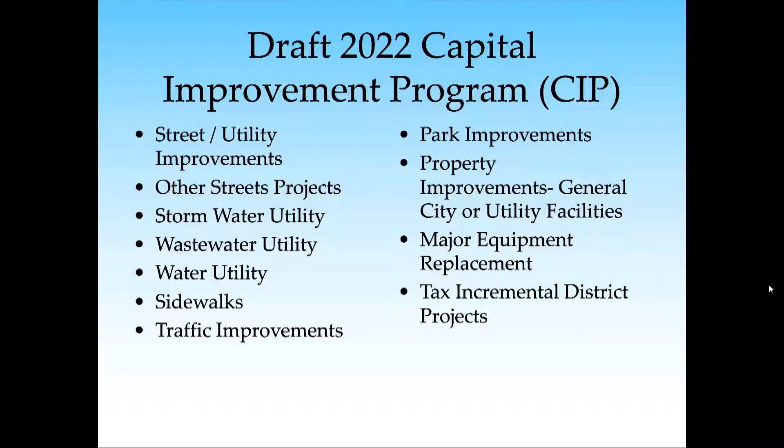It's been a great tool for helping us get information out about the 5-year program as a whole. Okay, it's more or less a dashboard for folks. Exactly what it is—it's an interactive dashboard for people.

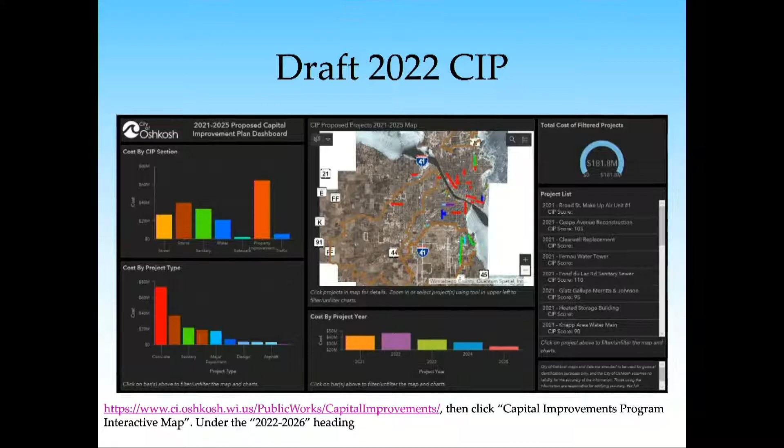Our biggest projects obviously are our annual street reconstruction projects. Those have the biggest impact on property owners, because quite frankly, their street's closed for several months, or at least torn up and closed for other parts of it. So looking ahead into the 2022 CIP, we break our streets down by their functional classification, whether they're arterials, which are the main thoroughfares, collectors, or local streets. So we've got kind of a mixture of everything in the street reconstruction program for 2022.

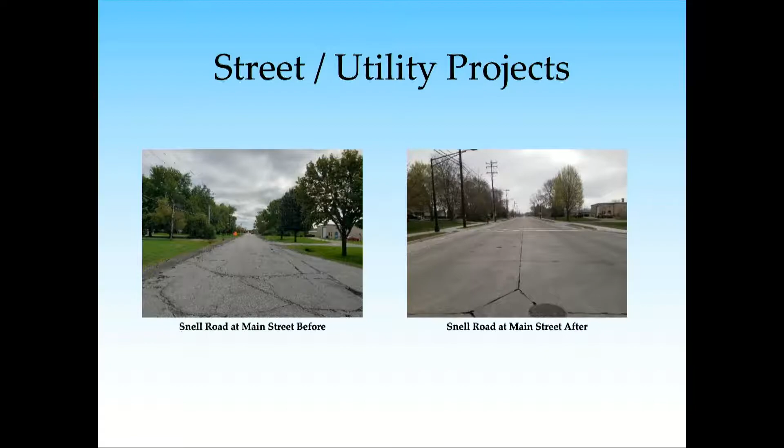Obviously, the biggest project of the year is Algoma Boulevard, from Wisconsin Street all the way to Congress Avenue. That's from Wisconsin through the university, up through the neighborhood association, past the museum to Congress. That is a mile-long stretch of street, and it's going to be a very large project with a lot of impacts.

We've been coordinating with the university for several months now and will continue to coordinate with them to try to make the project go as smooth as possible. Inevitably, because it's such an old street with such old infrastructure, there's going to be some unknowns that we'll encounter, but we're doing a lot of pre-planning with the university and private utility companies to identify everything we think is there so we can work around it in the plan.

That also includes the utilities under the street, it's a complete reconstruction, so sanitary sewer, water main, and storm sewer will all be replaced. Right now it's utility-owned street lighting on the WPS power poles; we'll be converting that over to a city-owned street lighting system as well.

The rapidly flashing rectangular beacons that are in use at the Reeve Memorial crossing right now, but not at any of the other crossings along Algoma, will be added to all of those pedestrian crossings as well.

We've also met with Wisconsin Public Service already to talk about their improvements. They're working with the university on trying to do some undergrounding of their electric in that area as well. So there's going to be a lot of things going on throughout next summer on Algoma, and a lot of utility work before the street can even get started on paving.

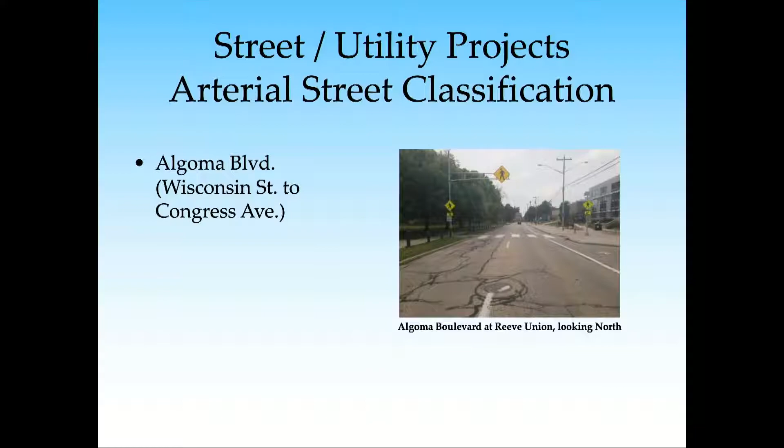We also have some other classifications of streets. Moving down, the next one in the classification list is generally a collector, which takes all your neighborhood streets and funnels them towards the larger streets. On our list for this year is Rosalia Street.

Right now we're working on Ceape Avenue from Bowen to the lake. Rosalia next year will start at Ceape Avenue and go up to Washington Avenue. This is really being driven in part by getting another major water utility backbone feed out of the water filtration plant. Right now there's a large distribution main that comes out down Merritt, and another one comes out Washington, so this is providing a little extra redundancy and another large outfeed from the plant.

But we also have to do a lot of storm and sanitary work, so the entire street on Rosalia is going to be reconstructed, and all of those utilities underground will be redone again. This street's going to get a little bit narrower - right now it's very wide, so it'll get narrower and the terraces will get a little bit bigger. There'll be a little more grass and green space as this project wraps up versus how it looks right now.

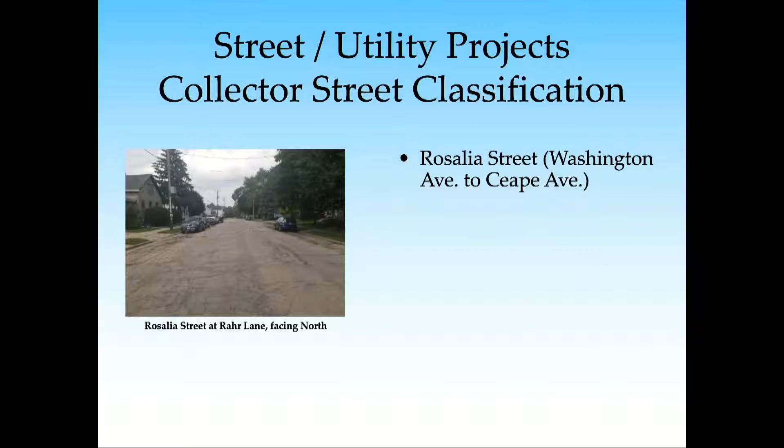Speaking of green space and seasonal things, generally when does the construction process begin? The process begins really, in all honesty, last summer with topo survey and design on Algoma. We've had our design engineers working on Algoma since last fall so that we could have these preliminary meetings with the university to coordinate on that project.

But the actual construction season itself, I would anticipate for a project like Algoma, our contractor will probably start with the underground utility work sometime in March. And given the size of that project, it'll probably be Thanksgiving before they get done. So it's a very long project.

It's not linear, meaning there are some spots that the contractor could start in a couple different places along the project. For example, we're doing a bunch of storm sewer work from High to Algoma on Vine Avenue, and Vine's being reconstructed as part of it. That storm sewer is one outlet out of Algoma where the contractor, when doing storm work, could start there and work both ways on Algoma. They could also start at the former Blackhawk Street vacated right-of-way, which is where the pedestrian mall is, from Reeve Union down to the Alumni Welcome Center area.

There's a lot of different ways that they can stage and work that way, but I expect Algoma will take the full construction season. Some of the other projects, Rosalia and some of the local streets we'll be getting to, will start a little bit later. They'll be smaller projects, so they'll start probably in April, but again October or November timeframe before they get done.

Question: many of these streets are in a residential setting. Will residents be able to get into their driveways during construction? Yes and no. During the utility construction portion, there will be some intermittent restrictions, meaning when the backhoe's digging the sanitary sewer right in front of your house, you won't be able to get into your driveway for probably several hours. But if you leave in the morning and come back in the afternoon, chances are they will have gotten past your house during the day.

But when it comes to the concrete paving part of the project, access will be cut off for approximately a 6-week time frame, because they have to get in and grade the street, pour concrete on one side, then flip to the other side a week later, and then come back and do some grading of the terraces and get the sidewalk work done. So it's generally about a 6-week window during paving operations where you will not be able to get into your driveway.

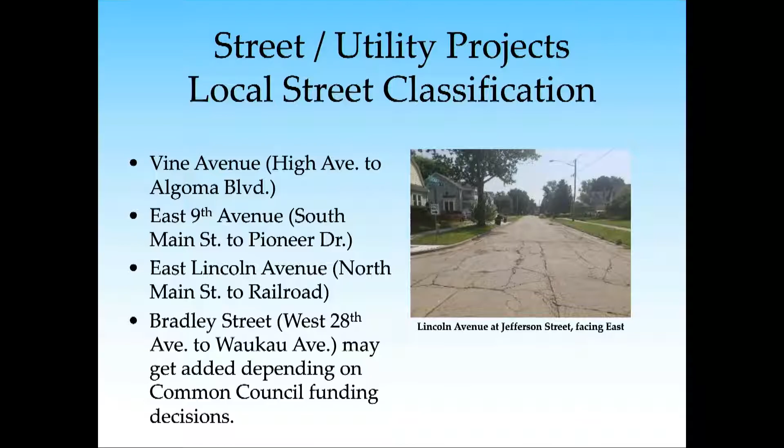I understand too that residents can get some additional information as far as what these projects would cost for them. Yeah, the city has a special assessment policy for any of our particular street reconstruction programs. So the special assessment policy and the rates are on the city's website. We'll talk a little bit later about what the current rates are—we have not established the rates for the 2022 construction season yet, so at this point it would just be estimating for people based on the 2021 rates. We'll touch on that later, but that's always a big question we get during our presentations: how much is this going to cost? So moving on a little bit with the street reconstruction program.

If you've driven down Algoma recently, you'll have noticed there's a contractor out there televising underground utilities right now. That contractor is working for the city, televising the storm sewer and the sanitary sewer, so we can see where service connections are and see if there's anything not in the records that we need to investigate further, so we can get that shown on the plans and make sure we don't miss things during the reconstruction program.

We'll also have a contractor out doing soil borings later this fall. There'll be some traffic restrictions in place during that time frame, but they'll be drilling holes in the ground and identifying the various soil strata that we are dealing with.

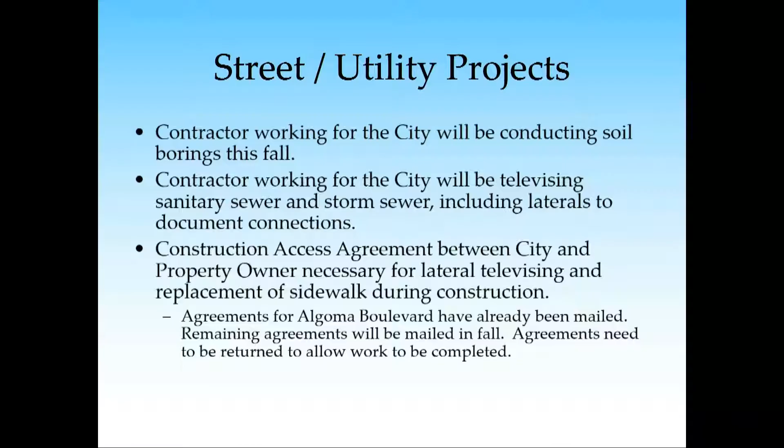And then there are some sanitary sewer projects coming up. Yes, the Oregon Street project has been going on for several years now. That started back in 2018. Big project, very big project. It started with installing an interceptor starting at 8th and Oregon, ultimately going south all the way to Ripple Avenue - several miles of reconstruction. We're complete all the way to Waukau Avenue as of this year.

So next year in 2022, we'll be looking at going from Waukau Avenue to West 35th Avenue. Then the last stage of the project from 35th down to Ripple will be done in conjunction with Winnebago County and a state DOT reconstruction of Oregon Street, or County Trunk Highway I, from 35th down to Ripple. There'll be about a one-year gap before that state project gets bid to finish it off, and then the street will get repaved from about 35th south to Ripple as part of that project.

Another big interceptor project we'll be working on next year is Bowen Street from Murdock Avenue to Anchorage Court. Back in 2014, we started with a big interceptor expansion starting at about Parkway and Hazel, went up Hazel to New York to Bowen, and then Bowen all the way up to Murdock. There used to be a sanitary sewer pump station right on the corner of Bowen and Murdock. By getting that interceptor extended up that far, we're able to eliminate that pump station, which reduces our operating and maintenance costs, because now we don't have electric costs, natural gas costs, or the upkeep on pumps and controllers. So the sewer project helped us eliminate that pump station.

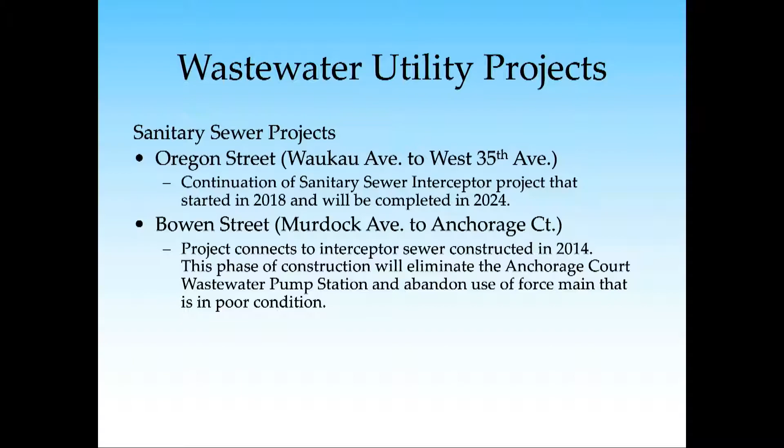Okay, that makes sense. And then also there's some work being planned, a major project over at water filtration. Yeah, certainly. We've had a lot of talk about the Clearwell project. We did a workshop with the Common Council, and there's been continued discussions about that. We continue to move forward with the analysis, and we're preparing for a public information meeting we're hoping to get scheduled later in August, or if not, early September, to talk more about that project.

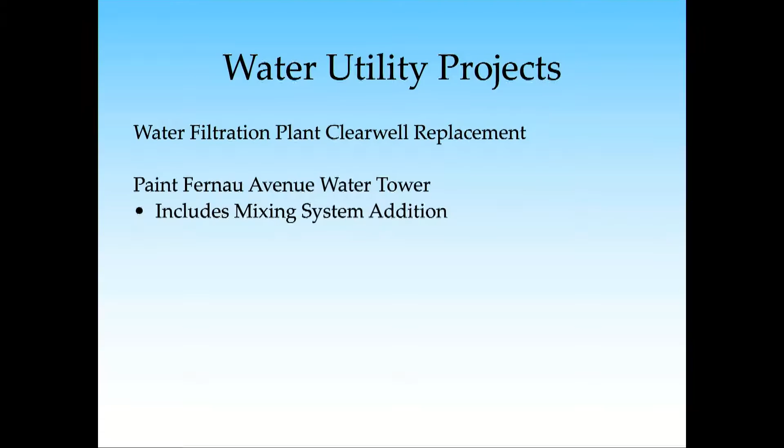It's been one that's been in the works for a long time. The Department of Natural Resources has identified a deficiency in the storage tanks out there right now, being that they're underground below the groundwater table. So there's a significant amount of work that would need to be done to do any type of construction to bring that storage up to code.

And we need about 2 million gallons of treated water storage on that site, not only to help us if, say, there's a significant fire overnight and the fire department's using 5,000, 6,000, 7,000 gallons a minute of water to battle a blaze. Our operators at the water filtration plant will see those water tower elevations start dropping on their control system, and they'll start firing up more pumps to pump water from these storage tanks back into the system.

That water is also used to help backwash our filter systems in the treatment process. It's very similar to a swimming pool filter. Anybody who has a swimming pool knows that periodically you have to backwash that filter media and clean it out. The same thing applies for our filter media at the water filtration plant. So we had a very detailed study that identified that we needed to keep about 2 million gallons of storage on site.

So we're going to continue to move forward with that, and also next year we'll be repainting the Fernau Avenue water tower and adding a mixing system in there to help improve water quality.

But the paint job, it's necessary. We take those out of service on a very regular basis and have them inspected by a consultant who specializes not only in water towers but water tower coatings, and can tell when, all right, this one needs to be done. And this is a full repaint, interior and exterior. So not only will the outside look different, but also the inside where our treated water is stored is going to get a fresh coat of paint to help make sure we're protecting that water supply from coming into contact with the metals that are part of the tank. And the mixing system helps improve the water quality in the tank.

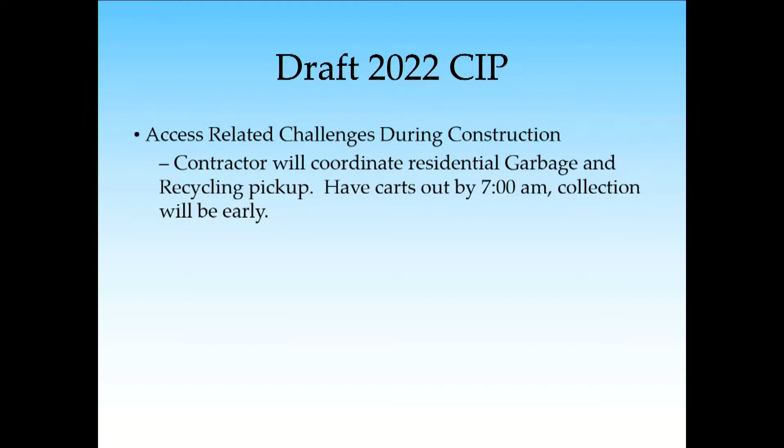We talked about it a little bit earlier, but there are some access-related challenges during construction periods. Obviously, anytime you've got a street closed due to reconstruction, it's going to be hard to keep access, so we've got to work through those things with the property owners.

City collected garbage is one of those access issues. We know what day each area is collected, so we write it right in the contract that contractor garbage pickup is on this day. You've got to help the sanitation division be able to get in and out, and if they can't get down the street, the contractor has to help them by bringing carts back and forth. Anywhere there's an ongoing project, sanitation alters their route so they get in right away at 7 o'clock and then get out so the contractor can work for the rest of the day. So if you're used to your garbage not getting picked up till 8:30, and you put it out before you leave for work in the morning—well, if your street's under construction, it's going to get picked up within the first 20-30 minutes of the day. So you've got to alter your thinking a little bit, and not get too used to putting it out later.

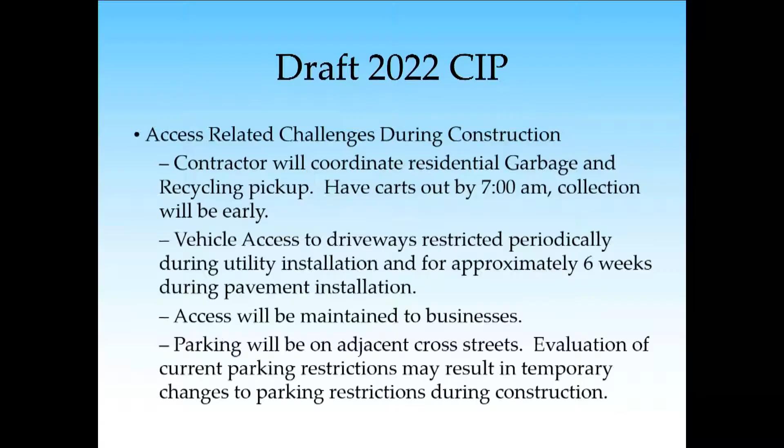We talked a little bit about vehicle access to driveways being restricted during utility work, and being out of your driveway for about 6 weeks during pavement operations. We do write in our contracts that access to businesses needs to be maintained. A lot of times, if they have two driveways, we can keep one open while another's closed. But even if there's only one driveway, the contractors have to work around that and make sure businesses stay accessible. Generally speaking, parking is going to be available on adjacent cross streets, and we take a look at parking restrictions on those cross streets, and at times we've altered those restrictions to be a little more accommodating during construction season. So it is difficult. Everybody likes to park in their driveway, but there will come a time during paving operations where it's just not possible.

My street was done a couple of years ago, and I had to park around the corner on a side street and walk the last little bit. It's just how it works—a temporary situation. Right, okay, all right.

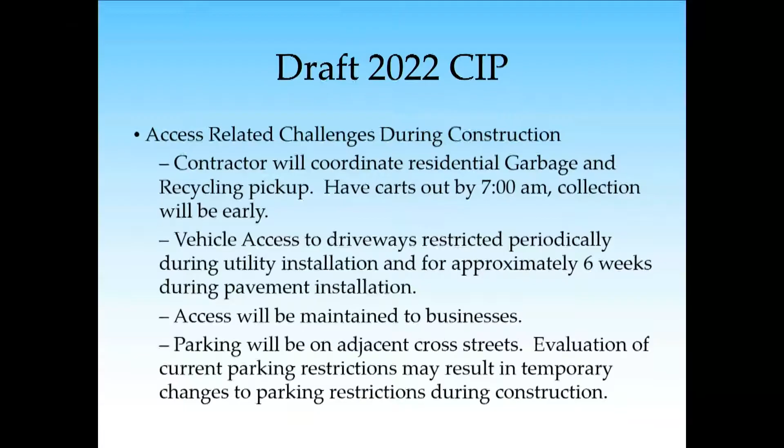Postal delivery would also be altered a little bit during these times. If you've got a mailbox mounted on your house, that's not impacted—your postal carrier will continue walking up and delivering mail to your house. But anywhere there's rural type mailboxes out at the street, that delivery will be impacted, and they may need to be temporarily relocated. The contractor works with the post office on that, to make sure people can still get their mail. As much as we've gone electronic in this world, there's a lot of mail that still gets delivered by the U.S. Postal Service, and a lot of things we order online get delivered by them too. So we need to make sure they can get in and do their job as well.

We talked a little bit about some of the special needs challenges that construction projects present. If you're aware of any of your neighbors that have a disability that hampers mobility, please call the engineering division and ask to speak with either the design engineer or one of the supervisors so they can coordinate with those individuals and get it written into the contract ahead of time.

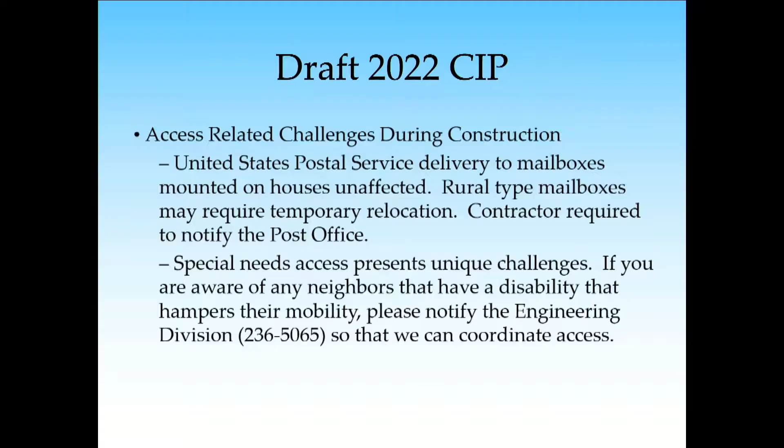We have a little bit of background information about project costs. The biggest thing is the special assessment policies on our webpage, and that's what we follow for putting together our estimates for the projects for individual property owners. As I mentioned before, the rates for...

2022 have not been established yet, but some of the rates for 2021 are presented on screen, and that information is also available on the website. People can use that to estimate at this time what they think the cost might be, or they can contact the engineering division office and we'll have a staff member walk them through the calculations for not only the street portion of the cost, but also the utility portions.

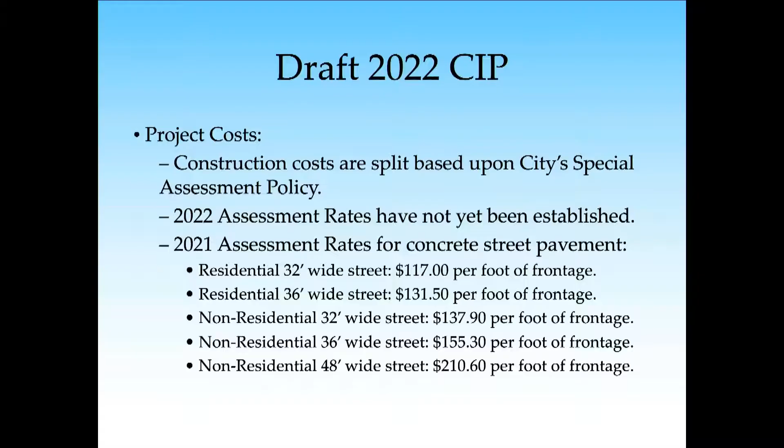The assessment costs are not just for the street itself or for the sidewalk, but also for things like sewer laterals or sewer relays. On already developed streets, where you already have a sanitary sewer lateral to your house, we split that cost 50-50 with the property owners. But if a new lateral is going in, that cost would be 100% to the property owner. We install storm laterals to every property as part of our reconstruction projects.

That way people have a spot to direct sump pump discharges to, or they can connect to that and extend it onto their property if they have drainage issues they want to deal with. Same thing with water laterals - the city is responsible up to the curb stop, so that is 100% our cost. But if there's a new water service going into a property, that would be 100% the property owner's cost.

And then sidewalk rehab, new sidewalk, driveway aprons - those are all costs that are calculated in. When we prepare our estimates that get sent out to the property owners prior to the public hearing, they get a full estimate of what the cost is anticipated to be.

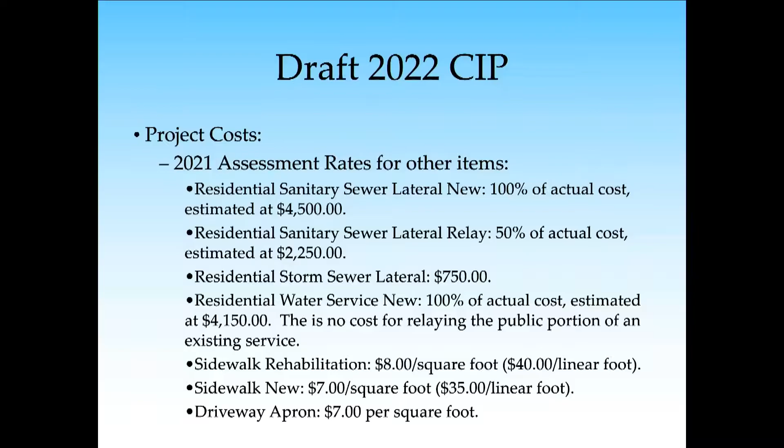So they can find all that information about the details of the costs through the Public Works website? Yes, you can find information on the Public Works website and the Capital Improvement Program page. Actually, there's a link on the website right under the Government tab - a CIP link, Capital Improvement Program. All of that information is available right there at that link, rather than having to navigate through the Public Works page to find it. There's a separate link right there for the Capital Improvement Program.

Okay, all right, very good. And I know that the Common Council has already had some budget discussions, some workshop meetings, but those are in process. Yes, Common Council started with a workshop on June 29th, really talking a lot about the Capital Improvement Program.

At that workshop, they decided they wanted to do a little bit more in general obligation borrowing. So then at the July 13th and 27th Common Council meetings, they held workshops before both of those meetings to continue talking about the Capital Improvements Program. The Capital Improvement Program will be heard by the Plan Commission on August 17th, and then the Common Council is scheduled to approve the plan for the Capital Improvement Program at their August 24th meeting.

And then moving into the budgeting side of it, there'll be a budget hearing on November 3rd, and then the budget approval for both the capital improvement plan and the operating budget is scheduled for November 9th.

We'll remind folks of those dates in upcoming programs and some of our social media, just to make sure that folks are aware of those opportunities to find out more. And there's a section at the end of every council meeting where the city manager talks about upcoming workshops and what else is coming on.